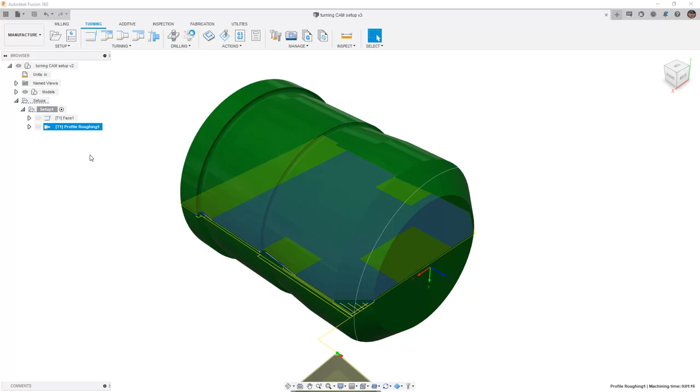In Fusion 360, we want to carry on with our turning CAM setup. At this point, we've created a facing toolpath as well as a profile roughing toolpath. Now we want to make sure that we remove all the material we can with the profile finishing toolpath. Now, based on the tools that we have and the geometry, we're not going to be able to completely finish this part with the profile toolpath, but we will get it extremely close. So we want to make sure that we understand all of our options.

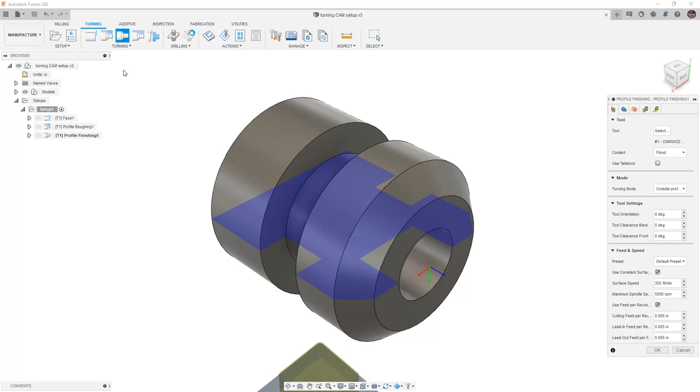So we're going to come into our turning dropdown and we're going to take a look at turning profile finishing. We're going to change our tool to something that's more applicable for finishing. And inside of this design, we already have tool number 10, which is a VNMG332. We're going to select this tool. And if we take a look at the preview, you can see the geometry and the insert is different than the one we used to rough the part.

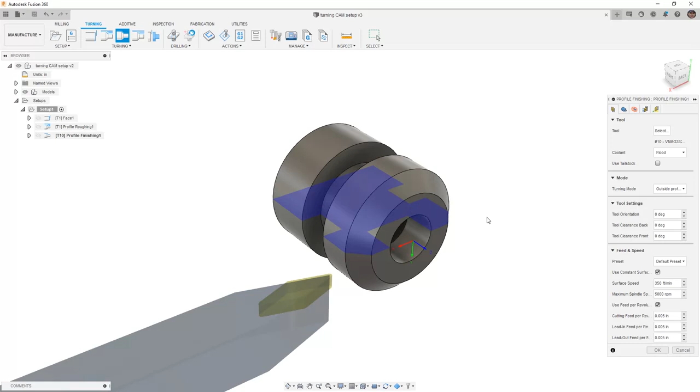Now, notice again that we're using outside profiling in all of the default settings for our tool. And in the geometry section, again, we're going from model front to model back, but we do want to add a small amount on the back side to make sure that we extend past. Now remember, we used the offset of minus 0.15 when we were roughing this. So I'm going to do minus 0.1 in this instance, which will allow me to go past the back of the part, but not all the way to where we stopped at when we were roughing.

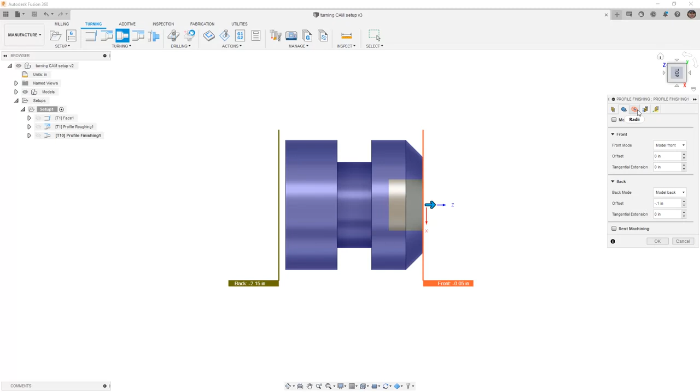The next thing that we want to do is take a look at the radii settings. Once again, we're going to be taking a look at the inside by selecting the inside diameter and make sure that we exclude that area so that the tool is not trying to go in. The next thing that we want to do is take a look at the passes. Right now, stock to leave is off because this is a finishing toolpath. But notice that we only have one step over and it has a specific step over value. I'm going to increase this to 2 step overs.

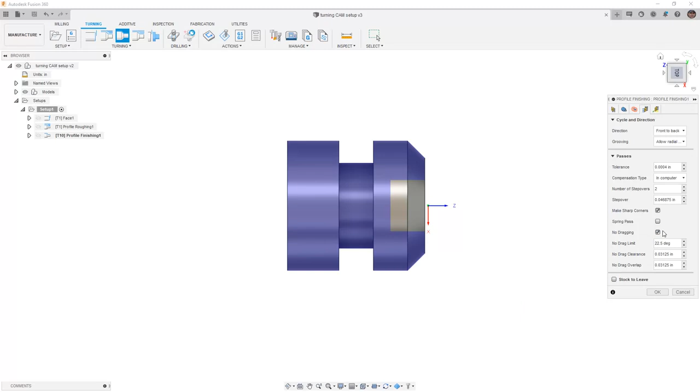Spring pass, which will repeat the final pass if we need to, and that no dragging option again. So I'm going to turn on no dragging, and I'm going to leave all the rest of the settings as default and say OK, and just take a look at what we have. So notice because we're extending past the part, that it's actually coming past and it's dropping in and digging into the back of the part. While this might be okay, it's probably not ideal when we're trying to come in and part this.

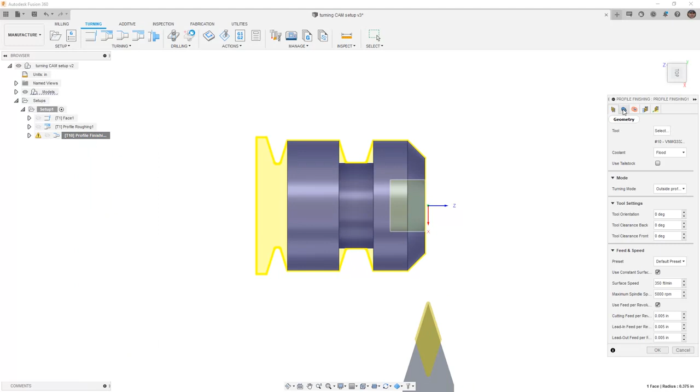So I'm going to make some adjustments to the toolpath by right-clicking and editing. And the first thing I want to do is go to Geometry and turn on Rest Machining. I'm going to turn on Rest Machining from the previous operation so it knows exactly what material has already been removed. I also want to make sure that the back mode, which is using that 0.1 offset, is actually making sure that we are extending far enough past the part, but we're not going too far. That 0.1 is going to be fine.

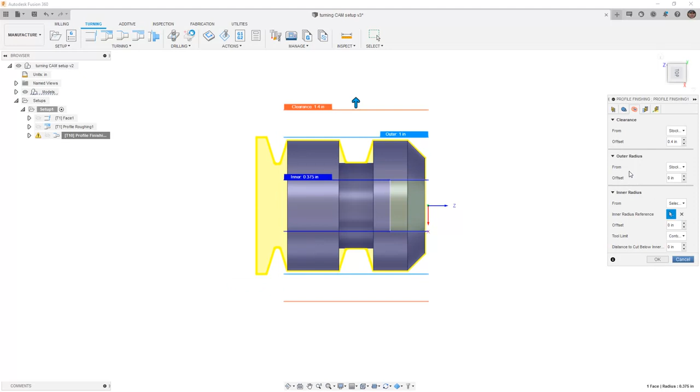So from here, we're going to move on to our clearances. Everything looks fine with our clearance values. And then we go into our passes. Now from our passes, again, we're using that no dragging. That's still the same. Make sharp corners is still the same. Number of step overs, everything here is fine. Notice in the top section, we have front to back for our direction and grooving. We can not allow grooving. We can allow radial, axial, or radial and axial grooving.

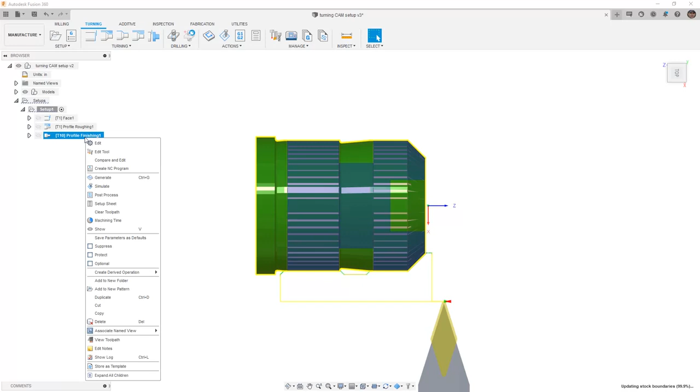If I select don't allow grooving and I finish this toolpath, notice that it doesn't allow the tool to drop into the groove or to drop off of the back section. Now, while we might want to remove some of the material from the groove, we don't have direct control over not allowing it to do both the back and the middle section. So what we need to do is we need to minimize the amount that we're going past the back just far enough for us to come back in and use something like a parting tool.

So I'm going to make one more adjustment to this toolpath. I'm going to go back to my geometry section, and instead of going all the way back 0.1, I'm going to say 0.05 for the offset on the backside. I'm going to say OK. Now we're allowing the tool to go back a little bit less off the back of the part, leaving more stock here. Now again, it's probably not ideal.

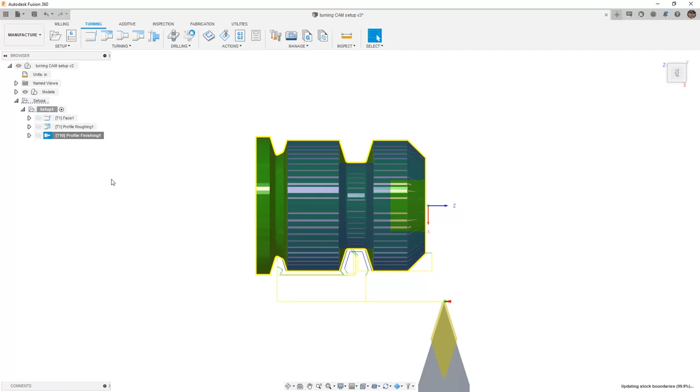There are more adjustments that we can make if we determine that we don't want it to go past at all. It is automatically going to take the center of the tool to that back edge. So if we change the model back to 0, so no offset, it's only going to take it back just a little bit based on the stock that was left behind. So again, there are a couple different options that we can play with depending what our end result is and how we want to move to our next operations.

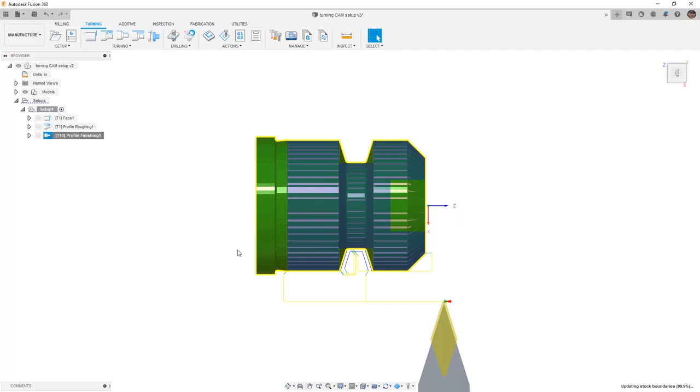From here, I'm going to go back to a home view and just review the toolpaths that we've created. We've faced the front of the part, then we've done a roughing operation, and then we've come back in with a different tool. We've cleaned up the front chamfer, we've gone down into the groove to take a lot of the material away, and we've done a small amount of cleanup right on that back edge, leaving enough for us to come back in with a parting tool and remove this from the rest of the stock. At this point, let's make sure that we do save this before we move on to the next step.